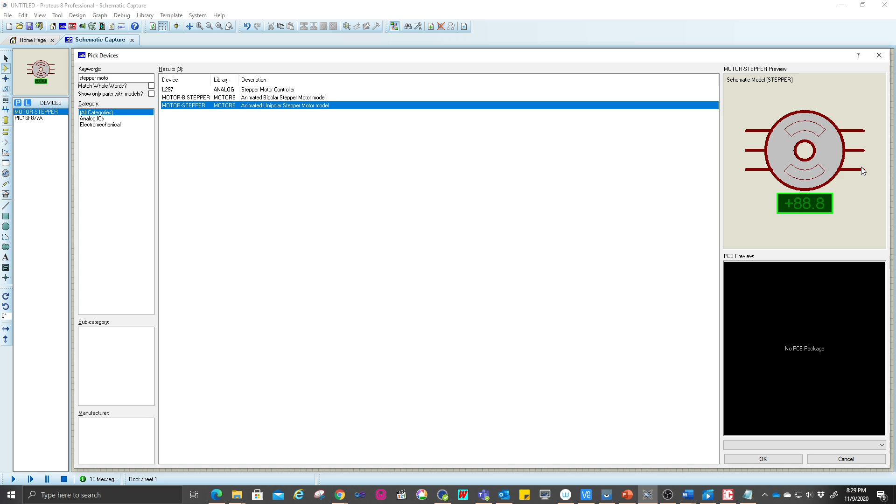Then you have to search for motor, stepper motor. So here you take the unipolar stepper motor model, which is this one. It has six pins, six connections. Two will be going to the ground, and the other four will be connected directly to the PIC.

So this is a basic simulation that I want to do, just to show this, because we should have the L293D also to be used to drive the stepper motor, since normally the stepper motor will have a rating voltage more than 5 volts. We also need to control the speed of the stepper motor by using PWM through the L293D. But before that, the simulation in Proteus is only for 90 to 45 degree step angle, so it's quite hard for us to look at the results on the speed of the stepper motor.

It can be tried on the hardware, but at the moment we cannot use the hardware, so we are going to try to use it on the simulation procedure.

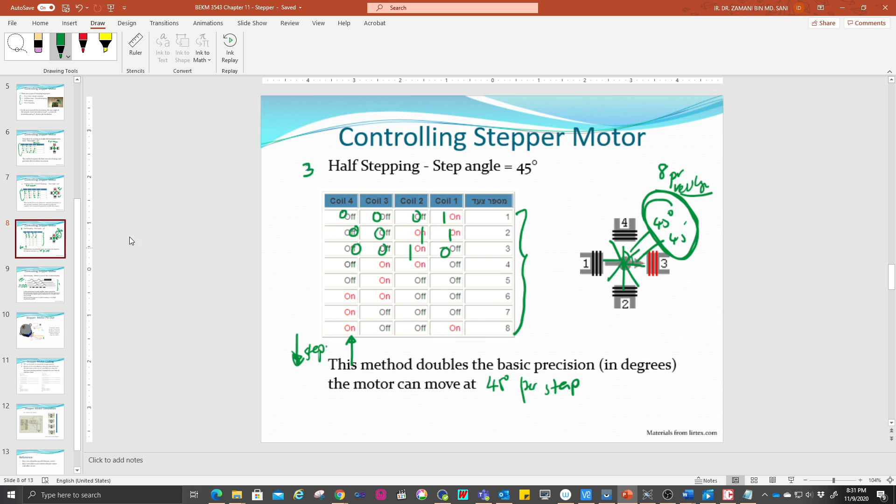Okay, let's try to work on the wave drive here. The wave drive that we learned before is this one. So we have 0001 - this is the case, right? We're going to have the step angle 90 degrees and 4 steps per revolution.

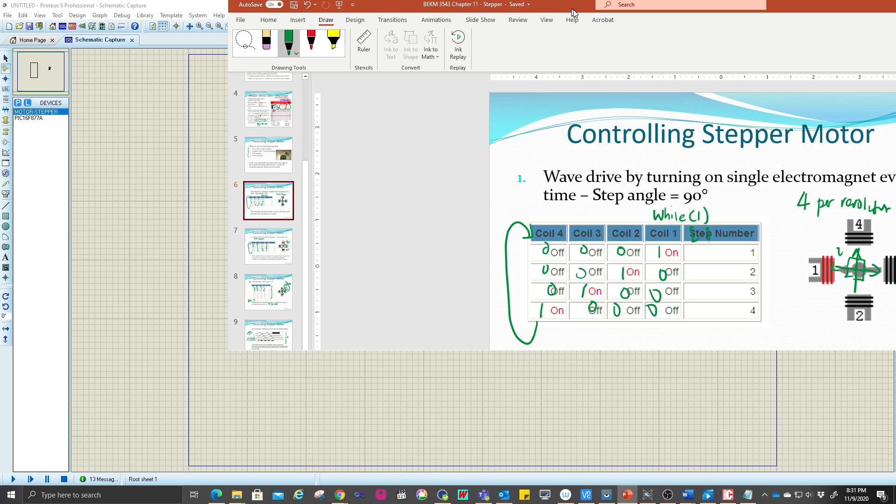Let's try to connect first. I want to use RB0 to RB3 to be connected. So according to this one, this is going to be the first pin, the second pin will be here, the third pin will be here, and the last pin will be here. The next two will be going to ground - I'm going to put ground here, and this is going to be connected to ground. So now we have RB0 to RB3, so port B is going to be output.

Let's try to write down the program. So you have your mikroC - this is the original one. Start with TRISB equivalent to 0B00000000. This is the one that declares my port B as the output. My first initial value for port B is all 0 volts - 0B00000000. Then you have the while one loop, then you have the bracket here.

This is the one that we are going to put inside here. So the first pin will be port B.F0, F0 is equivalent to 1. Then the next one is port B.F1 is equivalent to 0. Next one is port B.F2 is equivalent to 0. Then the last one, port B pin 3 is equivalent to 0.

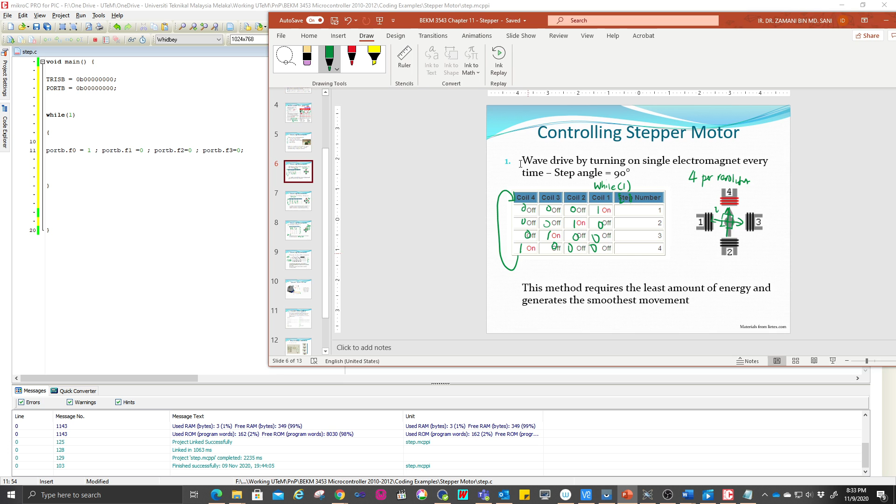So this is the wave drive that we're going to use - it's going to be the same thing. I'm going to start here 1 0 0 0, then it's going to have this sequence. I can just copy this one and change it accordingly, so this is going to be 1, this is going to be 1, and this is going to be 1.

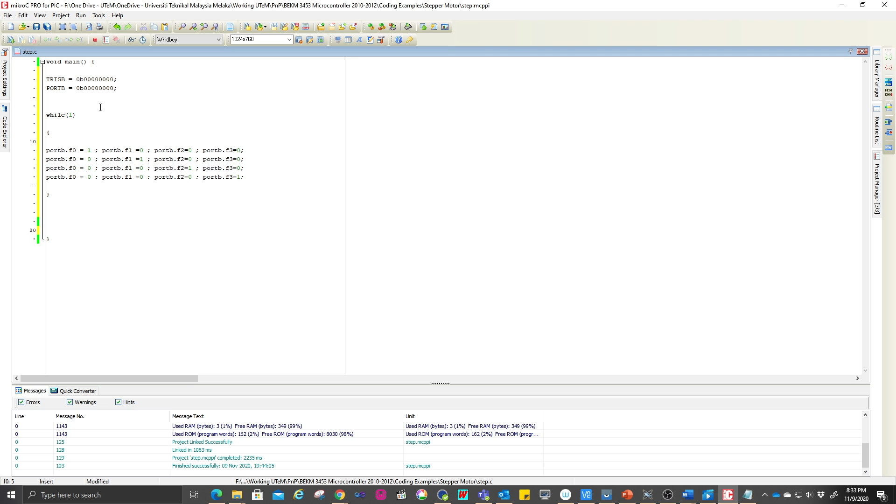Okay, I think it should be okay now. Let's try to compile this one, build. Is there any problems? No problem. So I'm going to run it in my Proteus. Let's run it. So you can see that...

It's very fast - the triggering is very fast, until you cannot see the movement of your motor here. So you need to add delay to have a simulation and to look at the results, because this is just a simulation, not the real one.

So let's go to the micro C again. Let's put here delay ms - maybe you can put 1 second. So copy all this, and compile again. All right, let's see what's the results.

Now you can see your stepper motor is rotating.

So let's calculate the step angle here. Let me draw some drawings over here in PowerPoint. So you have the value here - every stepping, let's take the stepping value. The first stepping value is negative 45, then negative 135, negative 225, and the last one is negative 315. All right, so that is the one.

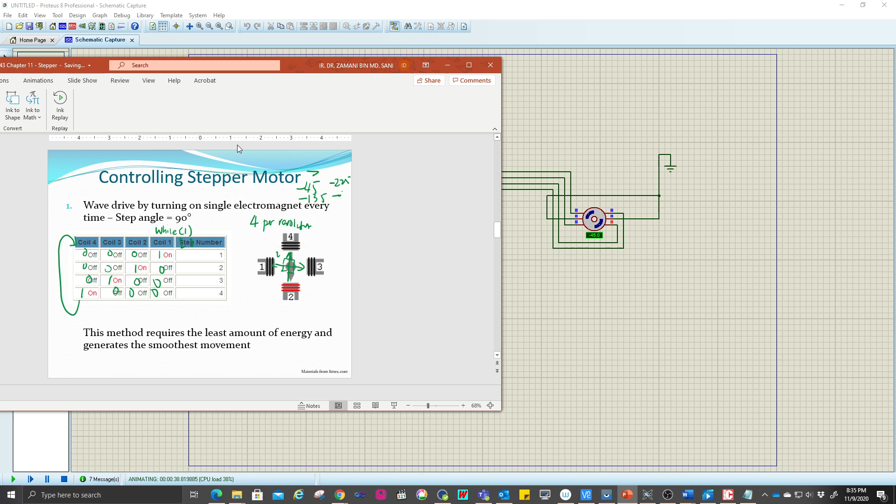After 315 is negative 45 again. So let's see, 315 minus 135 - this is 0, this is 2, this is 90, is it? 315 minus 135, let me just use a calculator. 315 minus 135.

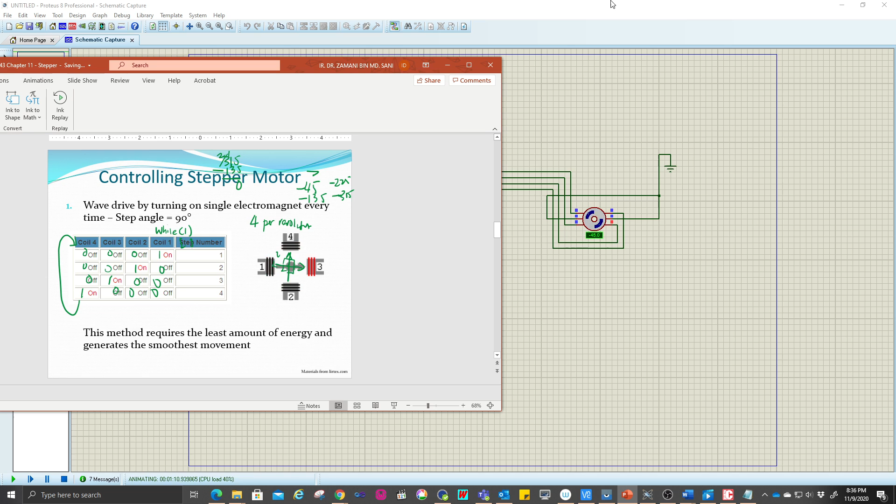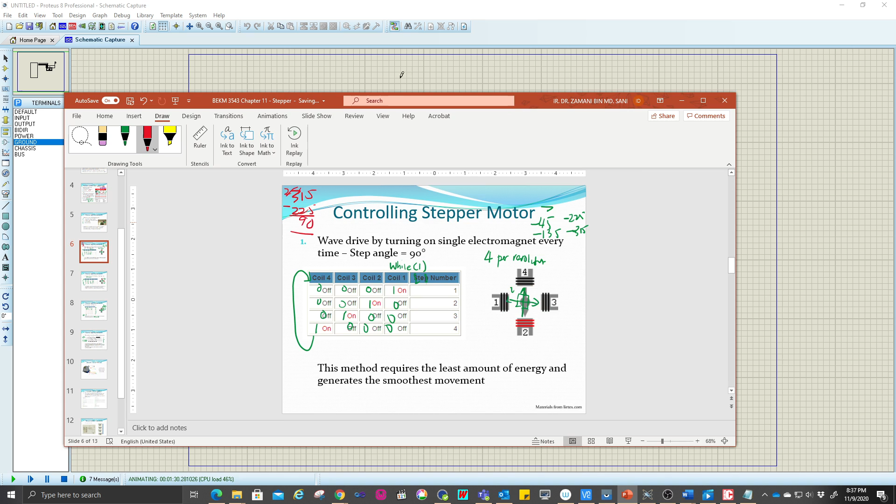Sorry, not this value. I should take this one. 315 minus 225, so this is 0, this is 2, this is 90 degree. So it's correct. You can see that by having each of the steps here, you have this pulse here one by one. You can see that this is also 1, 1, 1. Then this is your stepper motor rotating at 90 degree step angle, which proves this process.

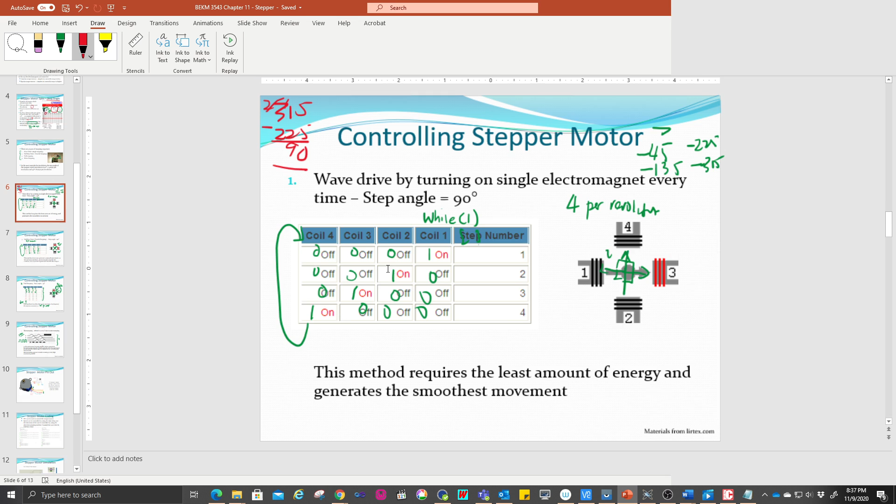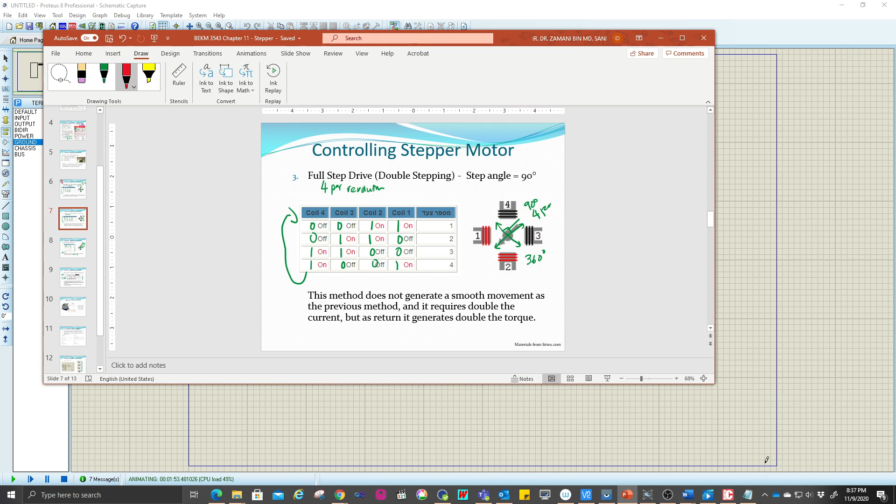Okay, let's look at the second one. You have to have this 0, 0, 1, 1 like this, so 0, 1, 1, 1. Let's try to have your code changed like this. So it's 0, 0, 1, 1, 1. I just want to follow this one, it's much easier for you to have a reference. This is 1, 1, then you have 1, 1 here. Then the last one you have 1, 1 down there. This is 0, this is 1, this is 0, right? This is correct. 1, 1, 1, 1, 1, 1, and 1.

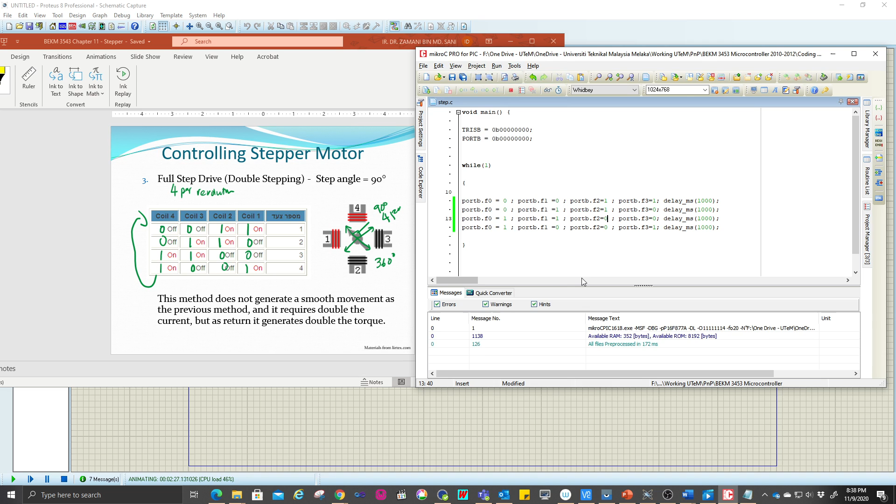So let's compile it, build, then run this one. Okay, let's start to see it. You can see that the red color is like this too. Then here, so this is double stepping, right, just now?

Okay, so you can see that now we are going to calculate the value. So the step angle, is still 90 degree difference, right? So you can see that it's 90, 180, 270, and 360 is 0. So this is the second stepping. You can see that this is the one, and the value is not just now that we have 225, right? This is actually another stepping. For example, like this one just now, you can see that the stepping is like this.

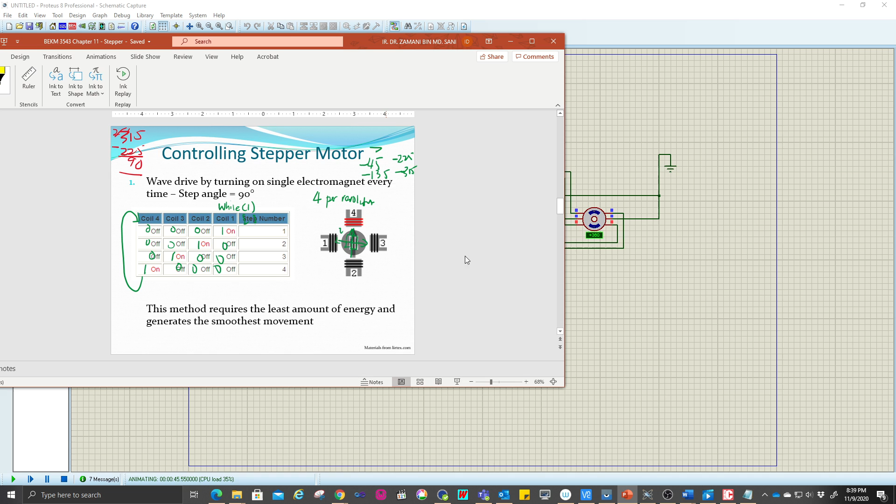Okay, and here is like this, right? So it's a bit different. That's why the value here is not directly like just now which is 315, 225. Here is much more direct, it's 090, which is the same like this one, 090. This is the one that we are running. Okay, and the last one, you have to follow this one. So you're going to do this one. I have my own code, so I'm going to post it over here.

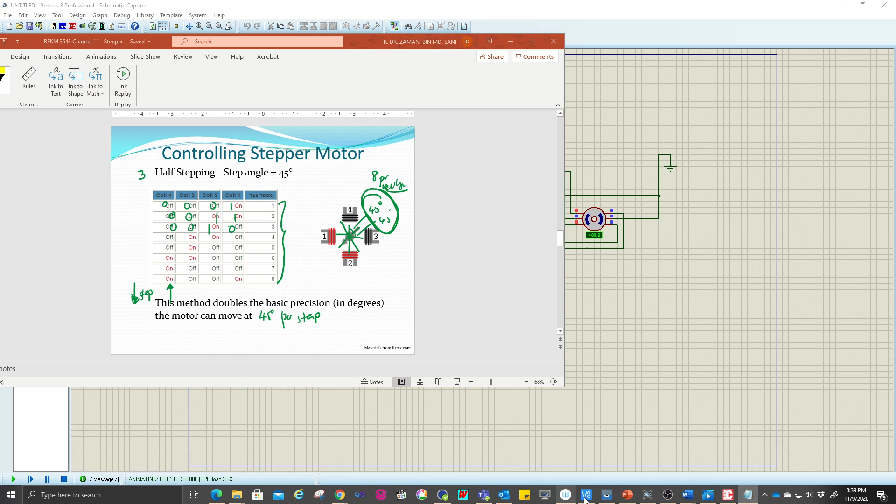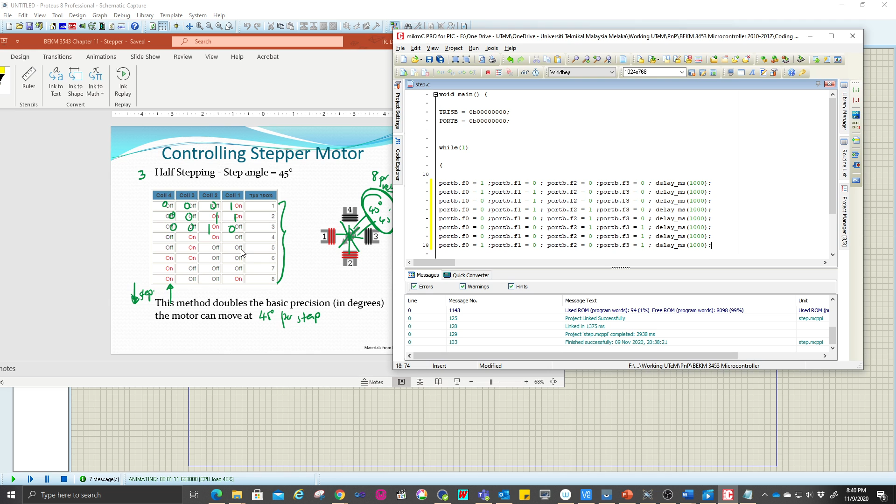Okay, I'm going to have it over here. So it's going to be eight lines: 1, 2, 3, 4, 5, 6, 7, 8. 1, 2, 3, 4, 5, 6, 7, 8. Okay, let's look at the results. I'm going to build this one.

Just run this one, and you can see that the value is like this: 2, 1, 2, 1, 2, 1, 2, 1. So let's look at the value of the rotations. It starts from 0 and then 45 and then 90. You can see that the step angle now is actually 45 degrees, so it's 8 per revolution. This is a smaller stepping size, step angle, so it's more precise compared to the first two simulations that we have.

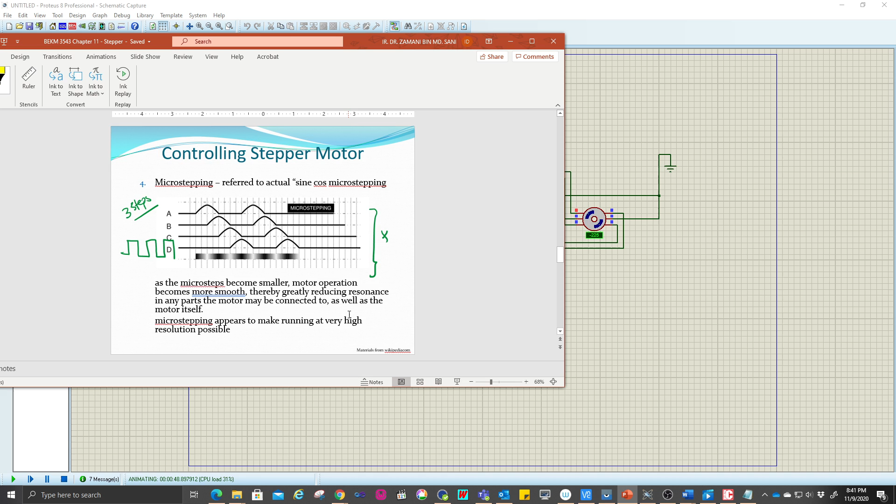So this simulation is only for us to look at these results only. We are going to have a real one in the hardware which has different step angles that you can control, basically like this. Okay, so this is a direct version. Because the fourth one just now is micro stepping, which I don't use in my PIC. So here is direct stepping, to show that you can directly trigger and give a pulse to control your stepper motor. But this is not real life, you can't do it that way, because you must use a driver.

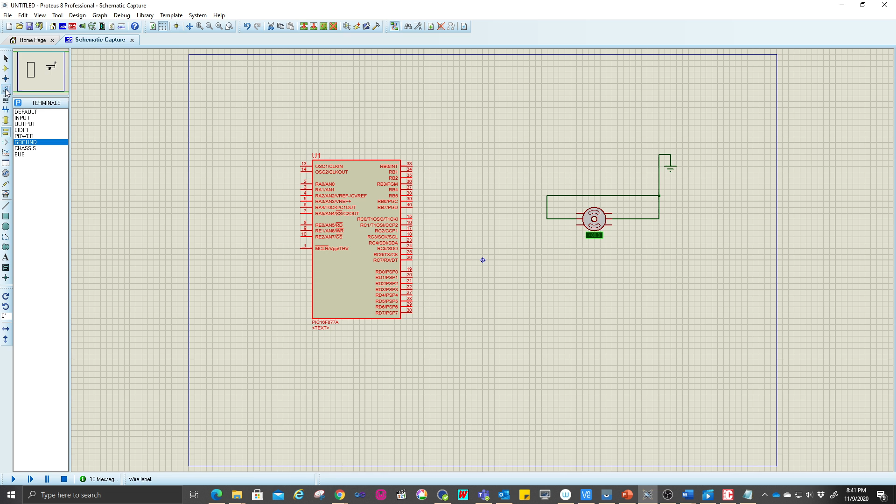So let's stop this one first. The connection must be like this, and then you have to run, and then you have to edit your code to make sure that it works correctly. So I'm going to move this one here. Then you have to find the driver, L293D. This is the driver, the same one we have used for the DC motor.

Okay, this is the case. So you have the RB0 just now start, right? So go for in1, and then you have in2, and then you have in3. So this is enable, sorry. Then you have in3 here, and then you have in4. 1, 2 connected to here, 1 and 2, right? Then you have 3 and 4 here. All right, you have these connections done.

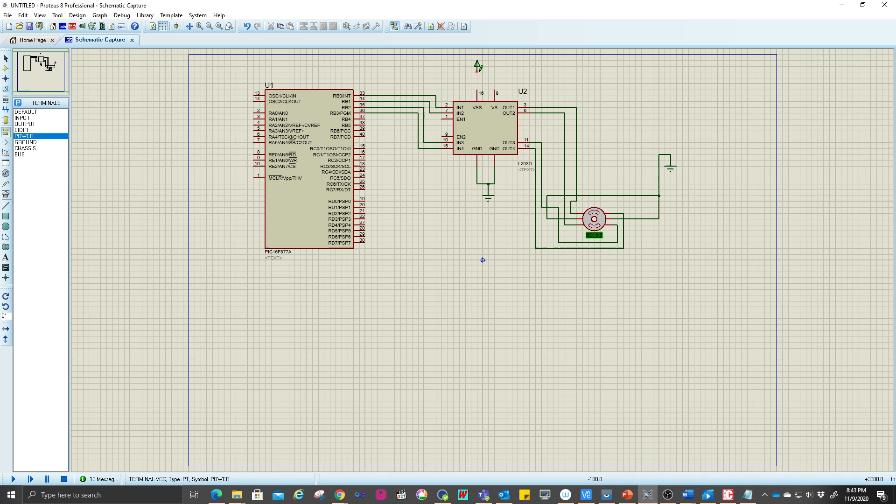Then you have the ground, you must ground your driver, there's a ground here. All right. Then again, this is the one that I made a mistake with last time. So VS is going to be the battery, so this is going to be power here at VSS. Power must be here. This one you can use a battery. So what's the value here? This is 12 volts, so you can put a 12 volt battery.

Right, this is a battery, DC voltage. And then this is ground, directly to ground, common ground. So this is a concept that you have to put first, and the enable 1 and enable 2 must be coming from the PWM.

For example here, if you want to use PWM1 CCP1, you must connect to here, and then this is going to be the same shared lines. So this is the CCP, the PWM that you want to control.

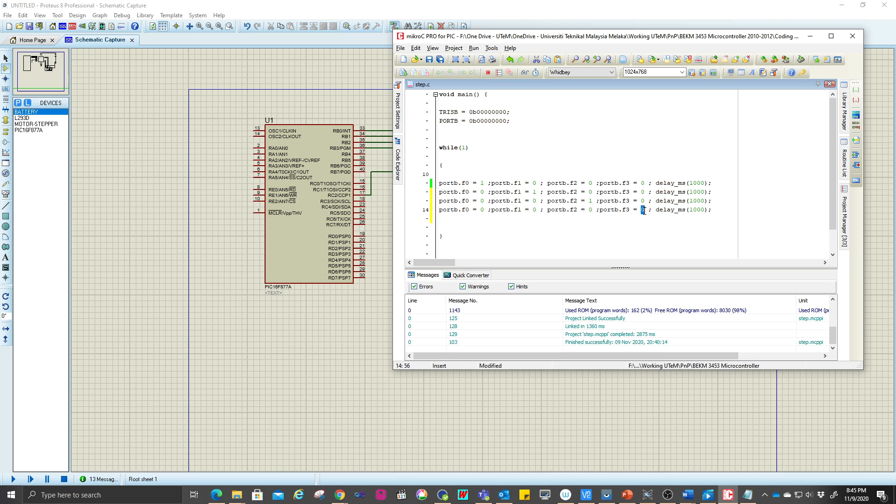1 1 0. This is going to be 0. This is going to be 0. This is going to be 1. This is a single stepping. This is 0, this is 0, this is 1. So we have to start the output at TRISC.

TRISC is equivalent to 0B, all it will be output. And then you have the PORTC, all now is going to be all 0 volt. Then you have to start the PWM, right? So let's go to the PWM library.

So we have to initialize this one. Right here, we have to initialize and start, right? Remember that we have to start it.

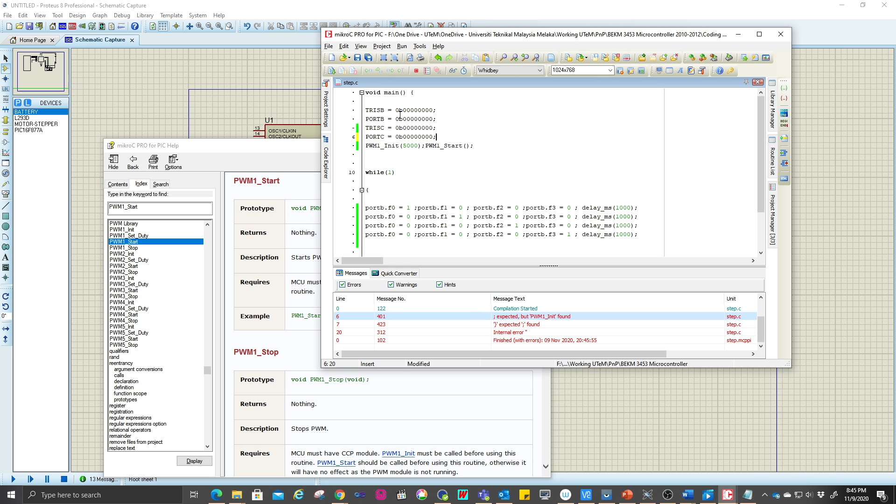Right, is it still okay? Build. So it's not found here. So okay, this is because of this one. So let's run again. All right, it's working because of the library already been added in the library manager here. Yeah, everything is checked.

So right now we are trying to set the duty, right? Set the duty. Let's try set duty 1. So 255. Set duty 1 here.

So let's try to put a full value, 255. So is it correct or not? I just want to try first over here. Let's have a look. Okay, is there any problem? No, no problem. So just build this one.

And then we're going to run it. Stop this one, we're going to run this one. So it's working, right?

Oh, I'm going to change, sorry, I'm going to remove this one. The milliseconds there is very long already. So let's try to remove this one first. Let's see what happened, because right now the speed I will control it from the PWM, not from the time delay anymore.

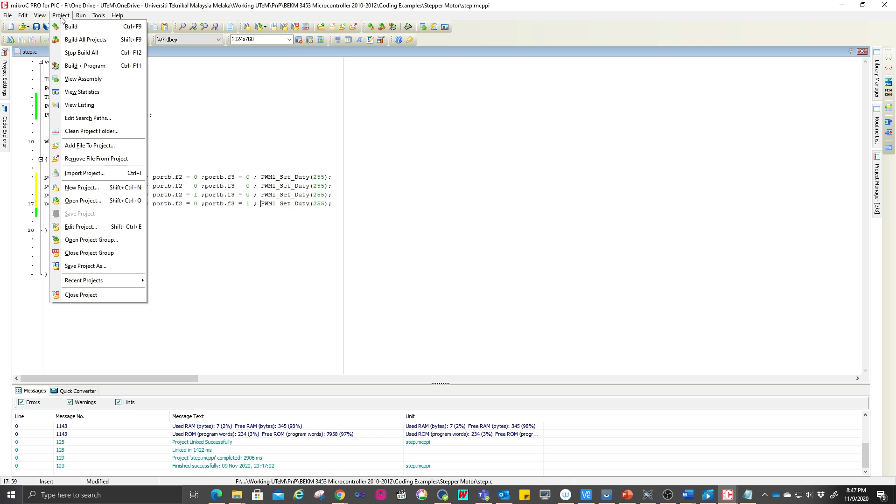Is there any problem for the mikroC? Alright, no problem. So yeah, that's the case because even though we use the CCP pins over here, it does not work correctly. The simulation is not working correctly. So let's try to change the CCP directly for this one, go to direct.

Okay, means that I put 5 volt to the CCP pins, to the enable, which is controlling the speed of the motor. This is very fast already, right? So the motor cannot move, and it's moving very fast here. So I still have to put the delay.

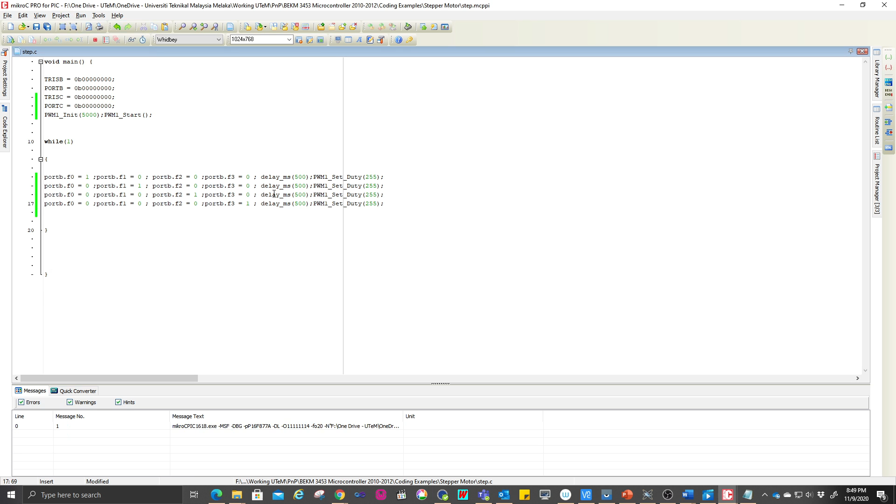So maybe around 0.5 seconds. Okay, let's look at the result. So I remove back this one, I just want to go back to CCP pins 1 here. All right, this is the one. Let's try.

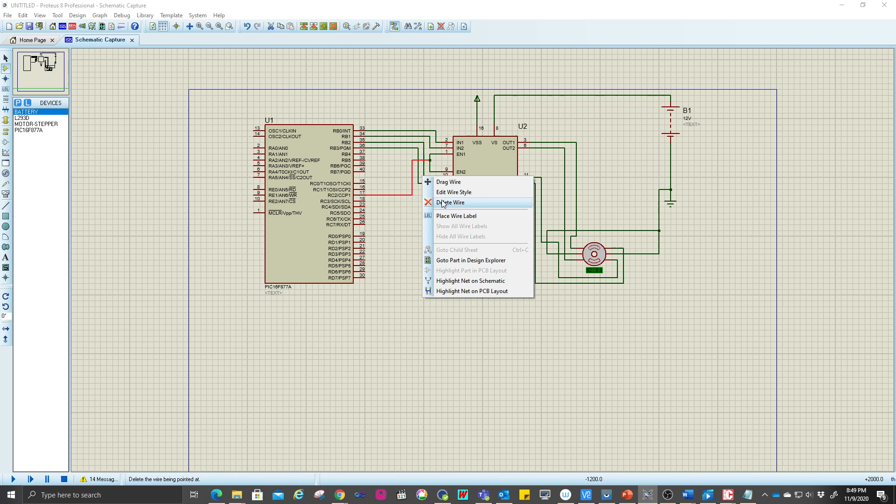It's much faster, you can see that, because it's always 100%, 255. It's much faster because this is the enable pin receiving a direct 5V, meaning it's always high. So this is going to be a full speed of your stepper motor, right?

So maybe I can remove this one. I'm not so sure. Let's see, this is working, right? Because we have a delay over here. So let's remove this delay. What happened if this delay is going to

be removed and the simulation is not working, means that we can understand that you have to use on the hardware to work with the driver to control the speed of the stepper motor. So let's run this one, build again.

Okay, let's run again. Yeah, without the delay just now, you can see that the motor is not moving. Even though you actually give the right stepping, you can see that stepping is working by sequence. But because it's very fast, you cannot see the simulation correctly. That's why we have to put delay over there.

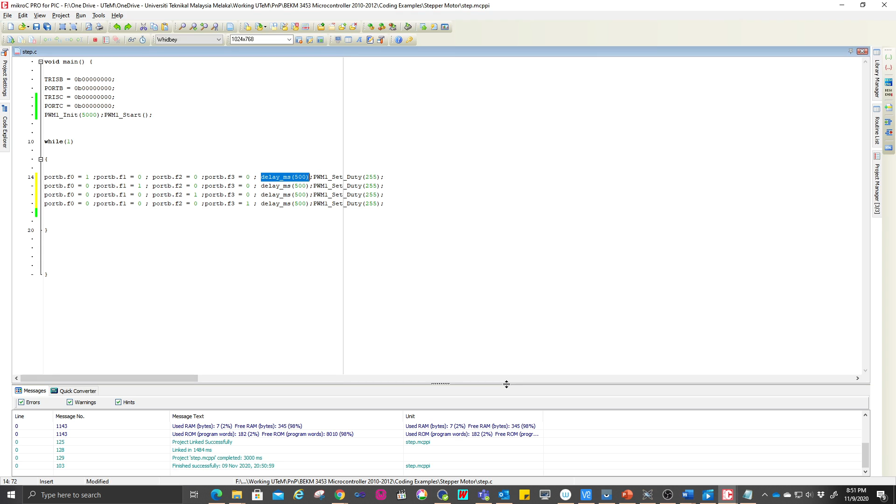So I'm going to put back the delay. So this is the one. You can build this one and run again. So stop this one. Run again. You can see that this one is moving back correctly.

All right, again, L293 is compulsory if you want to run. You must have a driver to run your stepper motor on the hardware. But on the simulation, we have problems here because it's not actually showing us the stepper motor speeds over here. But again, PWM can be given to the driver itself, and this can control the speed of the stepper motor.

All right, this is the method. So hopefully you can try yourself and understand the concept here. Okay, that's all for the stepper motor driving using the PIC and the simulations on Proteus.